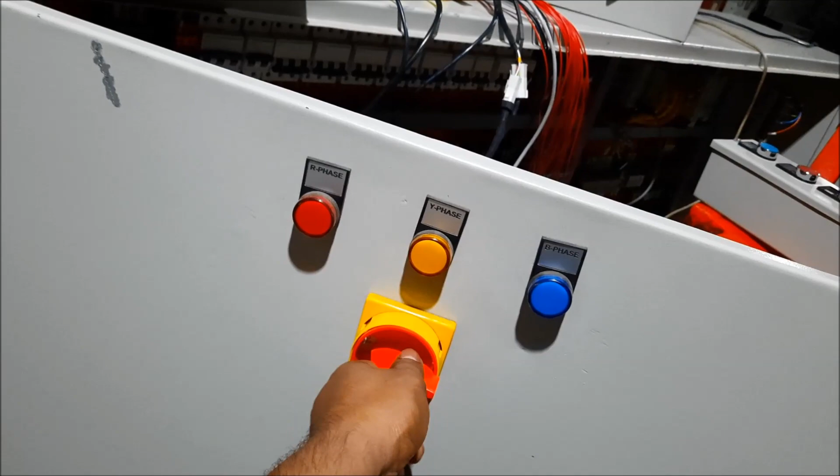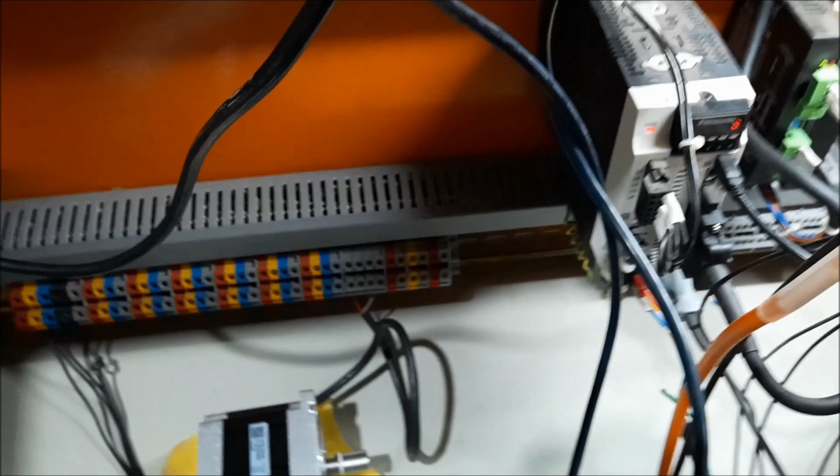We are going to test the control panel, and we are turning on the main power supply. In this panel, we have used the timer. That's why after some time the power came here, and for the safety purpose, we are using the timer so that if any spike or something happens, it won't affect our panel.

In this control panel, we have used the AC drive, that is a VFD, and there is one stepper motor, and there is one servo motor. See here, a Delta VFD we are using, and here is the stepper motor, and a Panasonic servo motor, and a Panasonic servo drive, and a stepper drive, and all the contactors,

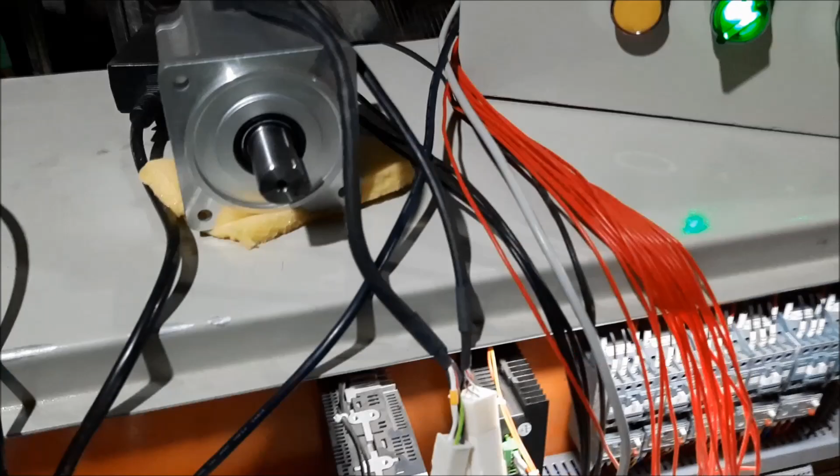and a Delta PLC analog module we are also using to convert, and we are using two SMPS, 48 volt and 24 volt. 48 volt we are using for the stepper motor for better torque control. We can run on 24 volt also, but we are using 48 volt so that the stepper drive and stepper motor run with better torque, and we can get more torque in terms of Newton meter. See here, the Panasonic servo motor is there, and the shaft is stopped now.

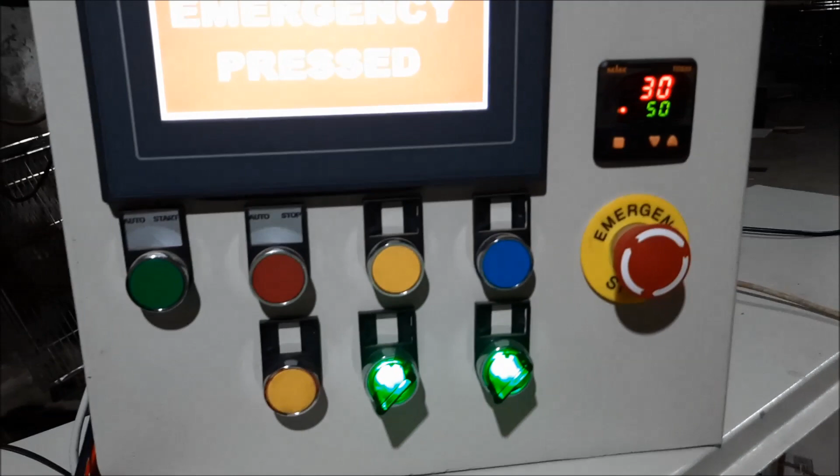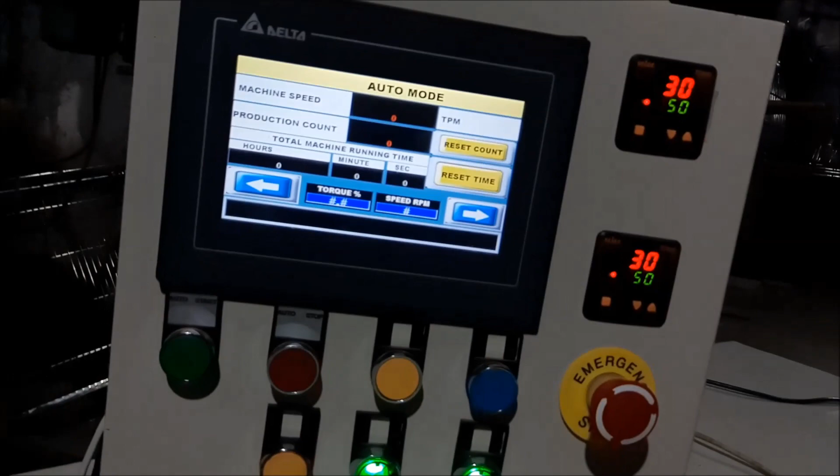There is the remote operating push button panel also. This is emergency, start, stop, and reset. And this is the HMI operating panel. Here is also an emergency button. We have pressed the emergency, that's why it's showing emergency pressed. Once we release, it will go automatically. And now we can see the manual operating button is also there.

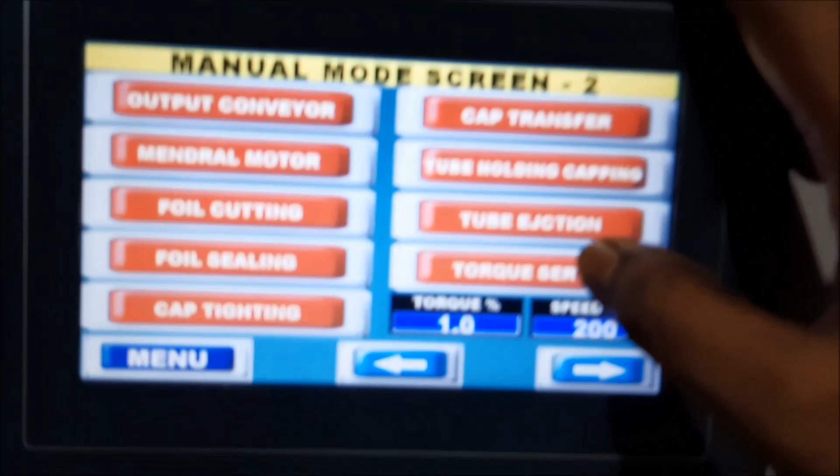So we are going to run this Panasonic servo motor by testing mode and by HMI operation. We have given the name here torque servo. Once we turn on that button, torque servo, the motor will start here. It runs slowly, because we have set the RPM, that is okay, but it's not getting that much torque because we have set it to 1%. So RPM is as it is, but once we increase the torque, it will get enough torque to achieve that RPM.

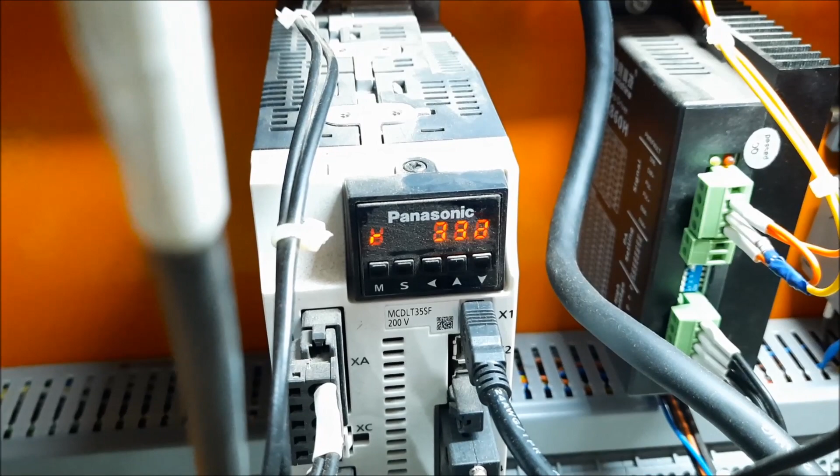See, the difference is here. We have just increased the torque, we have not increased the RPM. So it's working very well with the proper torque. And you can see the RPM on the servo drive also, 332 something it's showing. See here, R for RPM, and now stop, it's showing 0, and now start, it's showing 332, now 0, 332.

You can see here the servo motor starts again, stop, and start. So you can see here the servo motor is rotating in the proper way in the anti-clockwise direction. And once it's stopping, it takes some jerk because we are running in torque mode.

So I am holding the shaft with my finger with some certain force. It's showing here 0 speed, meaning the servo motor is stopped, and once I release, it starts automatically because I have given the run command, but we are applying a certain torque on the shaft of the motor, so it stops.

Because in this application there is the stepper motor, we can run this stepper motor also in test mode by HMI push button. So the stepper motor is running now, and stop, stepper motor running now. By inching button we are running it, start and stop, start and stop. See, start and stop. Here is the inching button for the stepper motor.

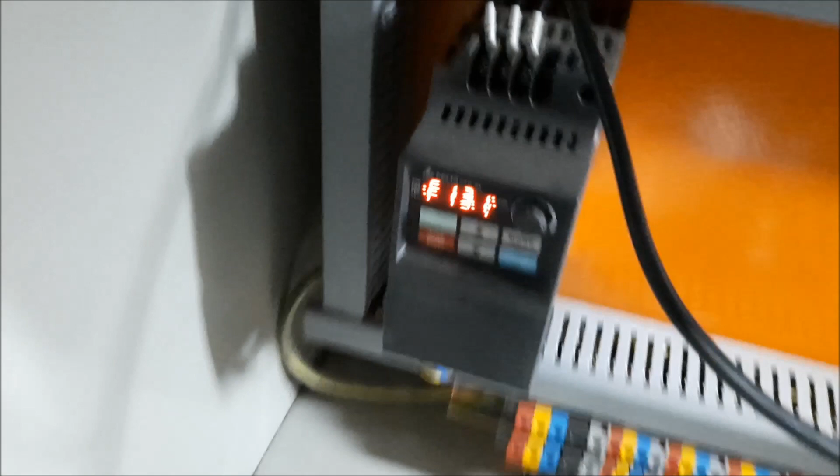This is the button for heater on off. There are two heaters we are using. For that, the temperature is showing room temperature. Once we turn on, there is a contactor for that heater. Stepper motor running. In this panel we have used the complete package for that.

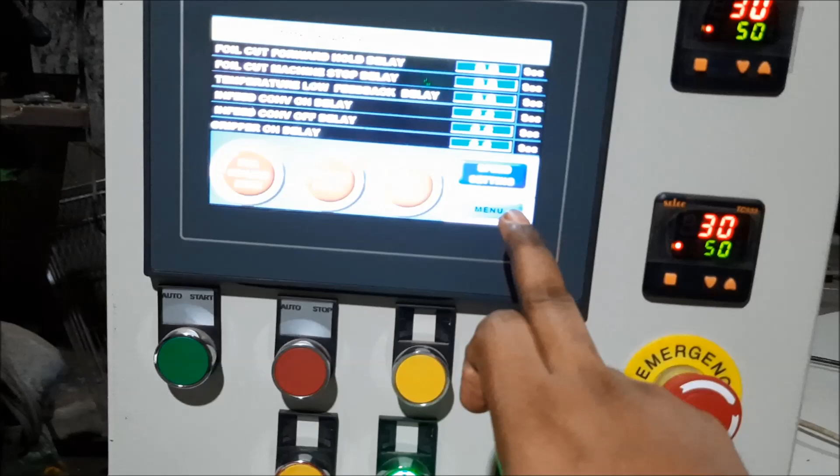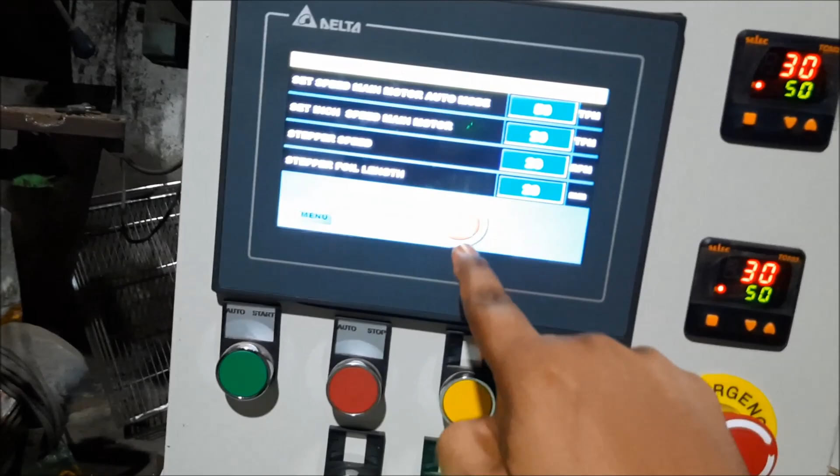And there is the VFD, variable frequency drive, and operating. We have shown the input output. We are going to change the speed of that variable frequency drive. Here is written TPM. TPM stands for tubes per minute. So we change the TPM, and the frequency changes, 32.8.

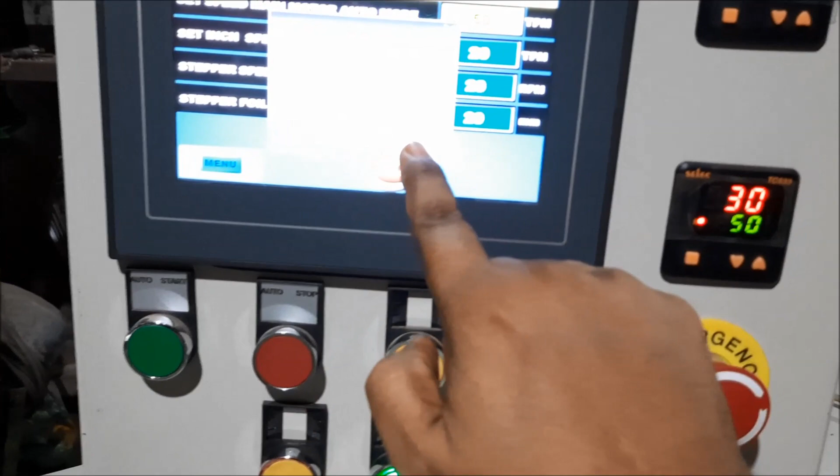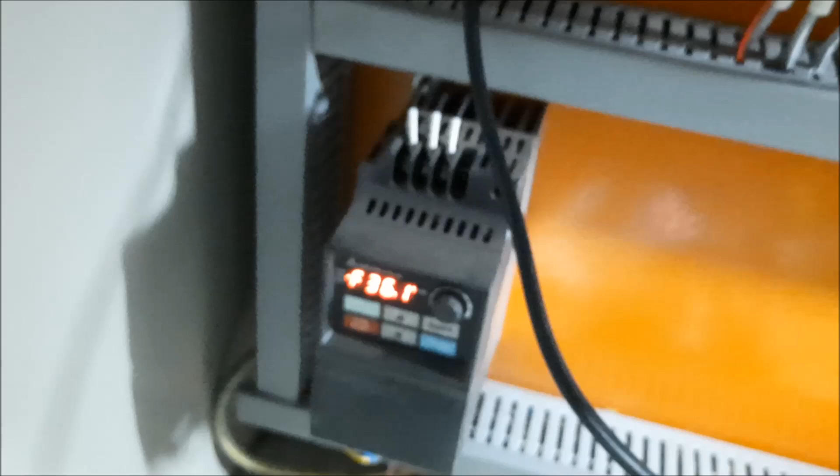We are changing the frequency by Modbus communication. For that we have used the telephone wire; for Modbus you can use a LAN cable also. 55 I have set for the RPM, that is converted by calculation into the frequency 36.1. So whatever frequency you want, or the operator wants, or the client wants, or as per the machine requirement, you can change it from the HMI and it goes directly to the VFD, and as per that the motor will start.

Now we will see how the motor runs in torque mode, and how we can set the parameters by Panaterm software. So we will see everything here in detail.

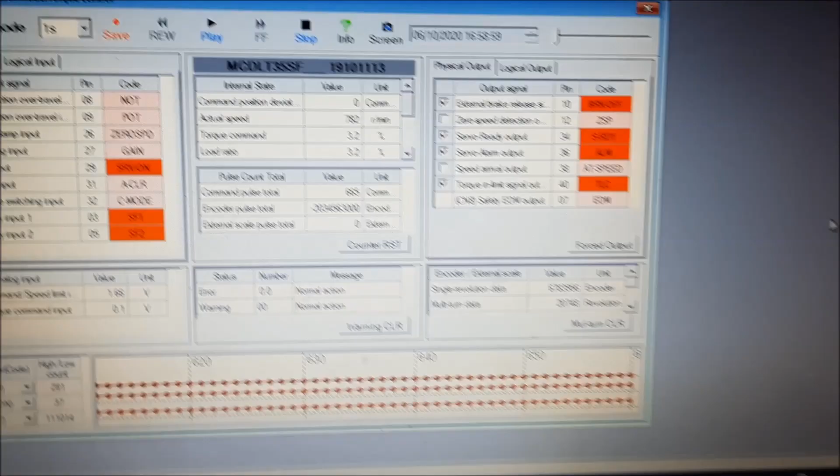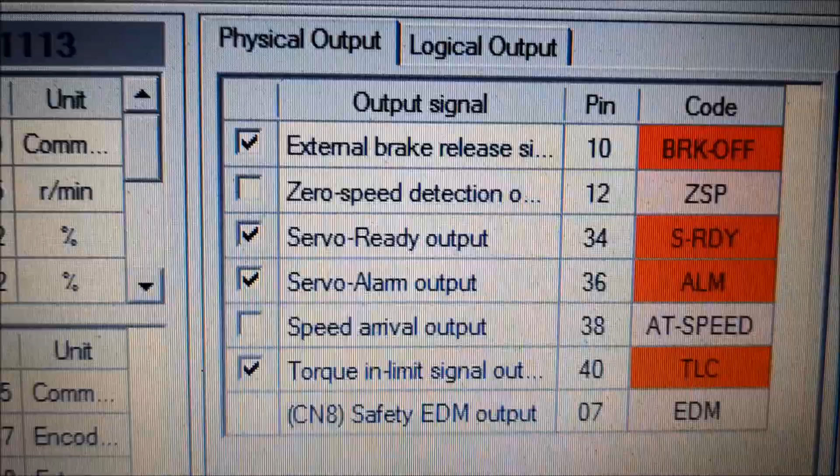This is the Panaterm software we are going to use. We are using the mini B type cable. We can see here the external brake release, zero speed detection, servo ready output, servo alarm output, speed arrival output, torque in limit signal output. So all detail, everything is given here. Torque command, actual speed, deviations, the command pulses, load ratio, all those things we can see here.

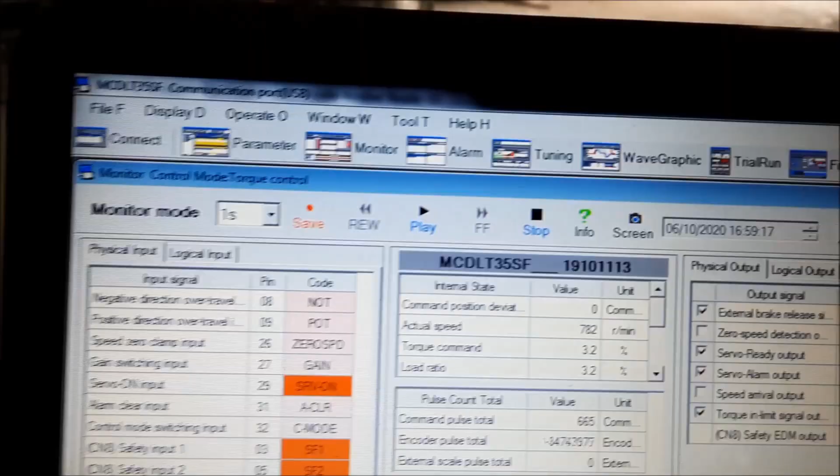The alarm also we can monitor. Basically we are in monitor mode. Now we go in the alarm mode. Once we press the alarm mode, a new pop-up page will open. See here, there are no alarms because the servo motor is running on the drive. There is no alarm, that's why it's showing no alarms. See here, you can see it also.

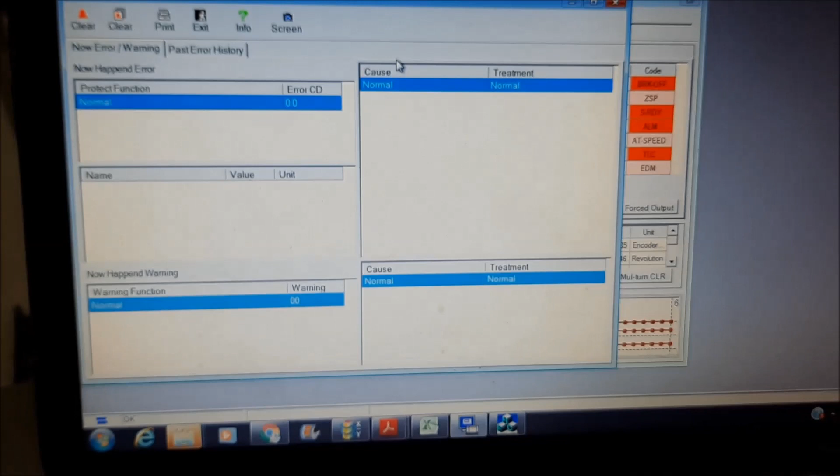And now come to the monitor mode, where zero speed detection, ZSP. So once the motor is stopped, it will show zero speed detection. By HMI we can run the servo motor. We have given one button for that.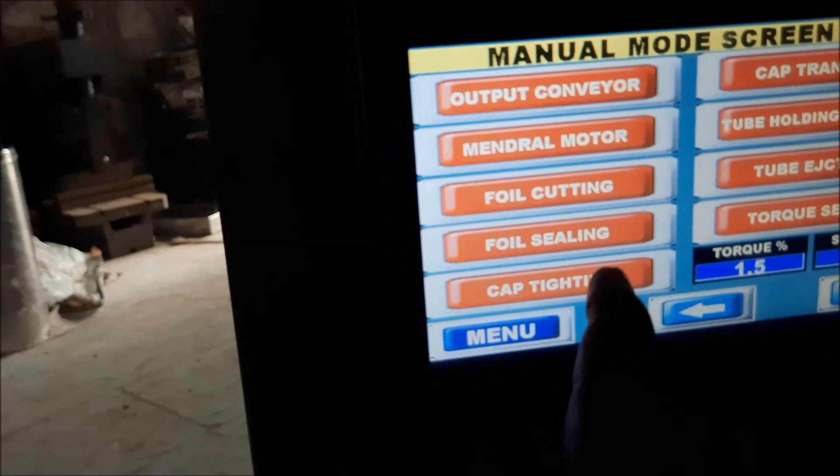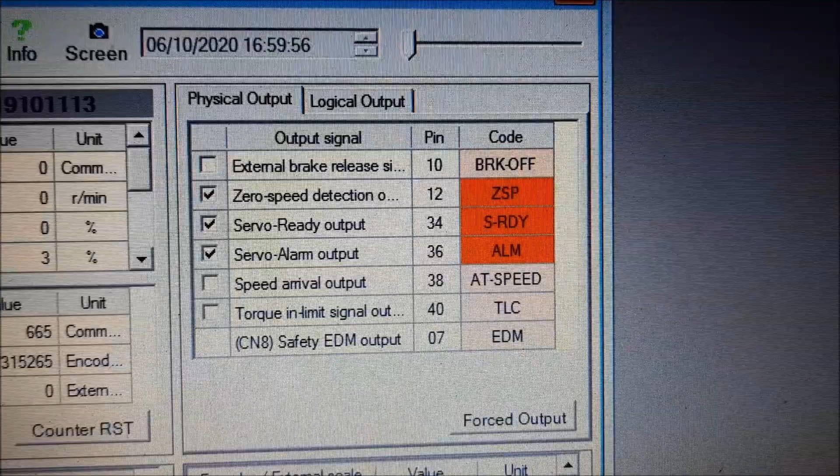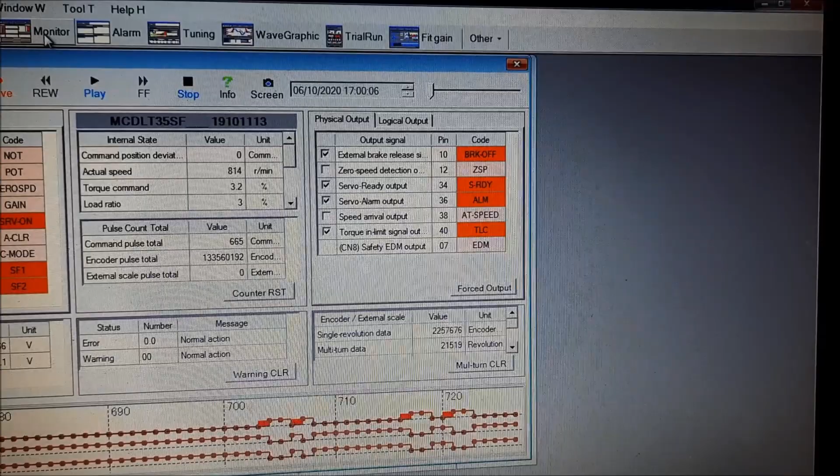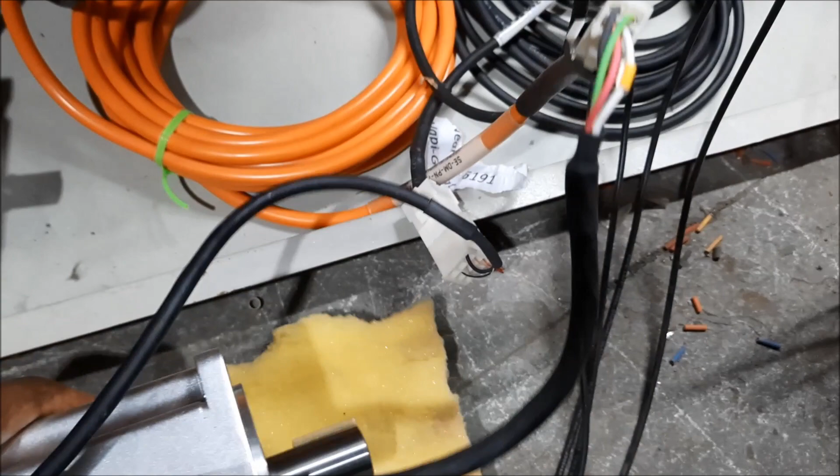The important thing is that we are running this servo motor in torque mode, and for that we are giving 0 to 10 volt for the speed and for the torque also by DA card, digital to analog. Note it down, digital to analog DA card. Okay, Delta DA card, DVP02DA.

So I'm going to stop the shaft by holding and applying some certain torque or force. So it's stopped now, and once I release, it will run continuously, because we have given the continuous run mode command. We are not giving zero speed, and we are not stopping the run command. That's why once I release it, once we take back the force applied by our finger, it's again achieving that speed and that position. So you can see it clearly.

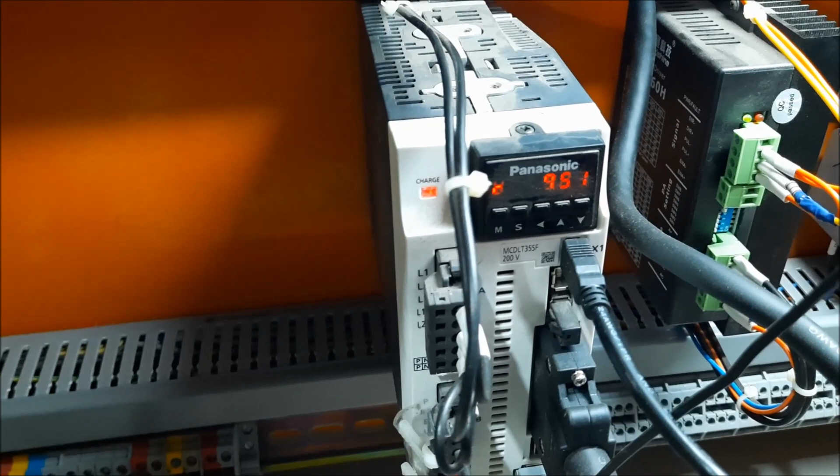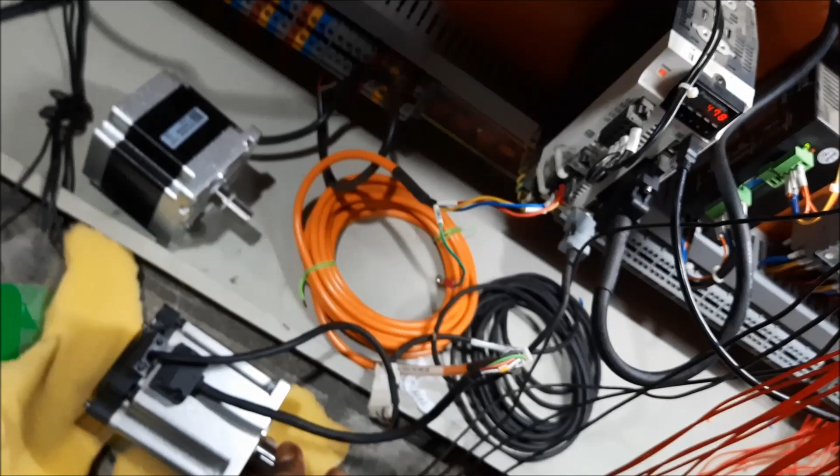We can see on the display also the speed of the actual servo motor on the servo drive. R for speed, and now it's showing 0, and now it's showing certain speed, 600, 700 something. So it's going up and down. See how fast it's achieving that speed. Just for testing and trial purpose we are running it. We can run this servo motor at 3000 rpm. The rated speed for this servo motor model is 3000 rpm.

In the picture we are showing a stepper motor also, so don't be confused. There is one servo motor and one stepper motor. This is the mini D type connector we are using, and it directly goes to the laptop. Interface cable is there, encoder cable is there, power cable is there, and just beside the Panasonic servo drive there is a stepper drive, and these cables are for that: power cable, encoder cable.

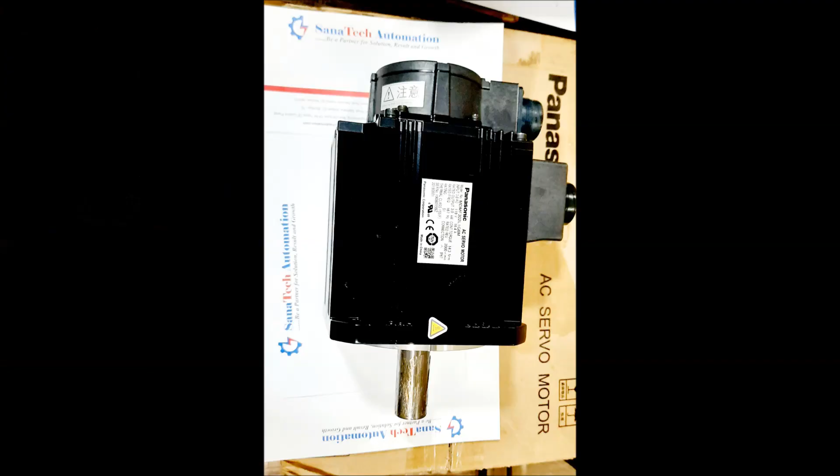We will show online how the stepper motor is working. Now we come online, and we have written the instruction DPLSY K2000, and once we press the inch button, it's working here.

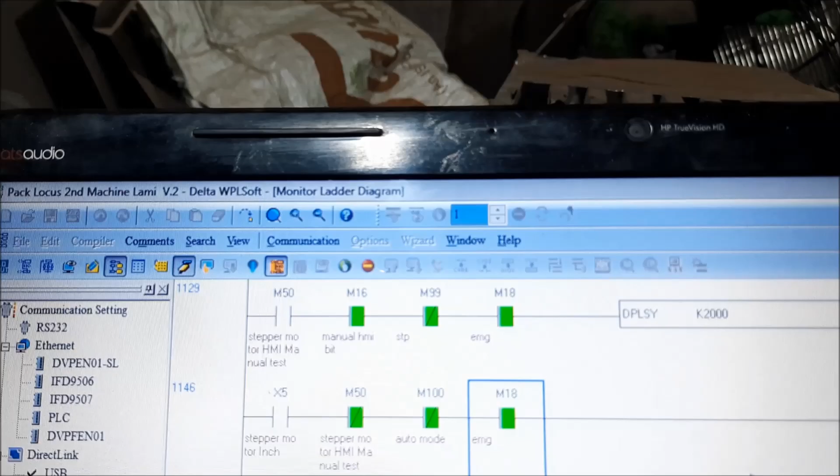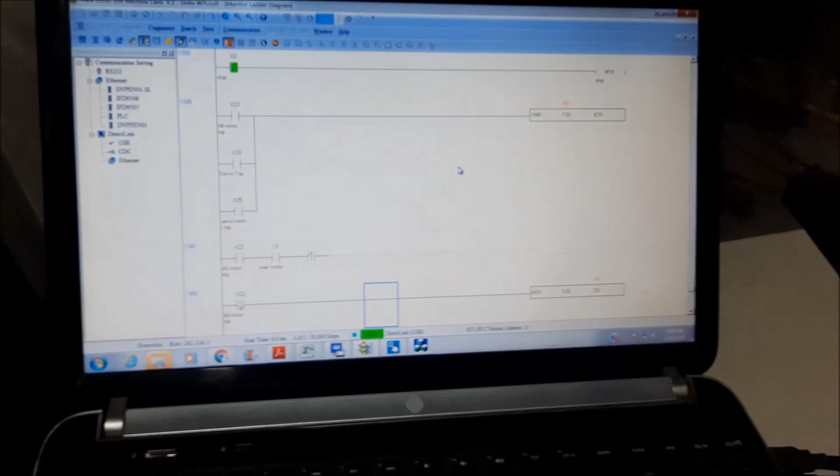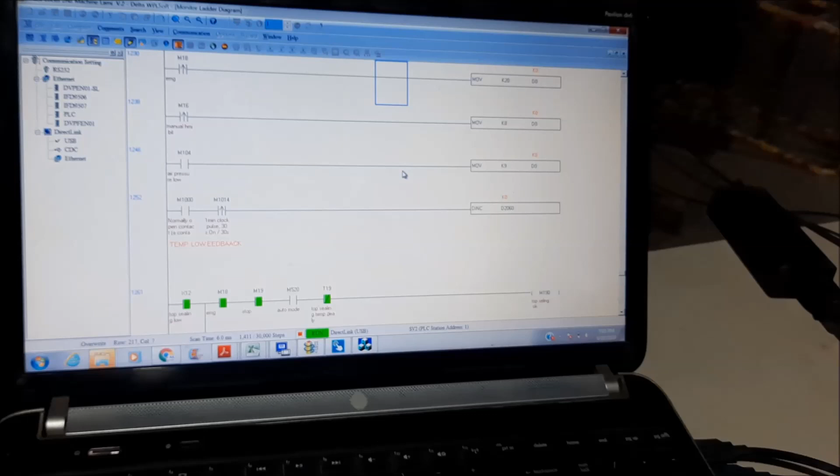And for the torque mode we have written 0 to 10 volt for the speed, and once we scroll down we have written 0 to 10 volt for the torque also, as per the client requirement and the demand of the machine. So we can increase the torque and speed in terms of the 0 to 10 volt.

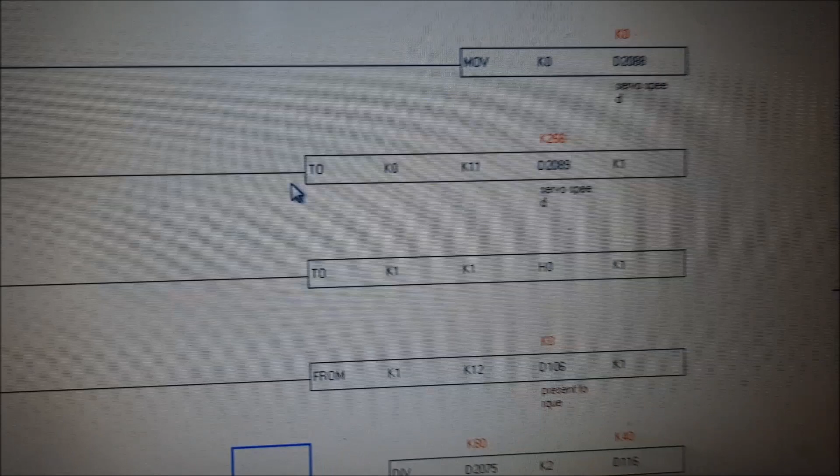So see here, we have written servo speed and all, read and write function. You can see here in the comments also torque and everything. And we have done scaling also.

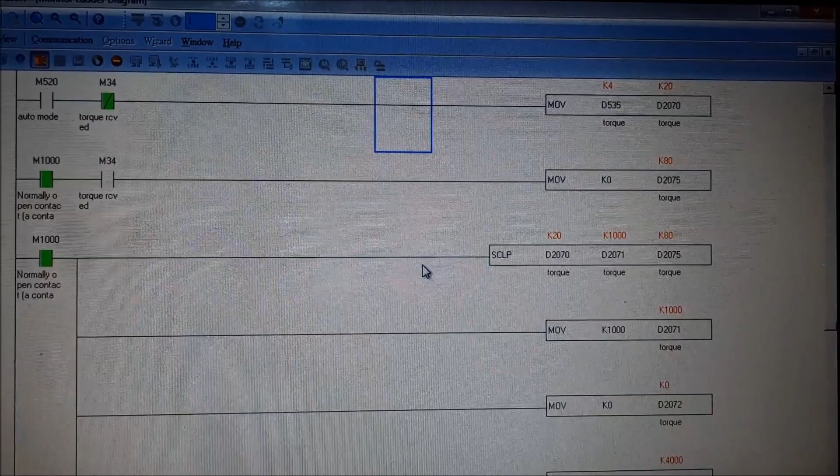This machine is going for Fevicol. The Fevicol tube, where the cap tightening and everything is done by this. As per the customer, the operator will set the torque here. Once it tightens the cap of the tube, the servo motor will automatically stop.